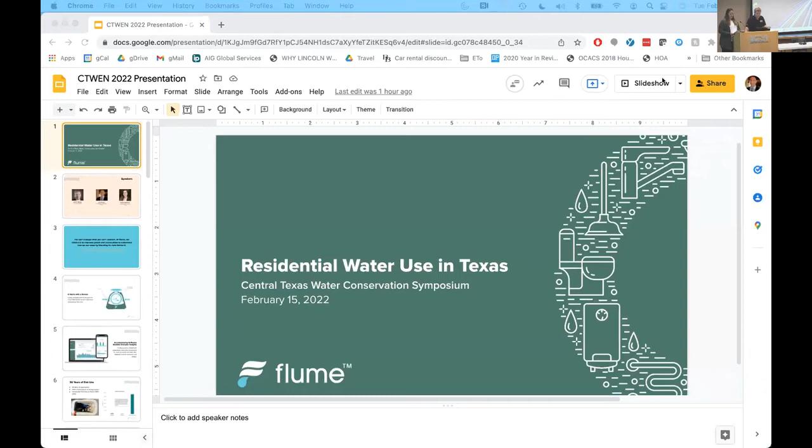But for those of you who haven't seen some of the insights from the magnitude of data that Joe and all the folks at Flume have been collecting on water use in Texas, I think you're really in for a treat. So thank you. And thanks, Joe and company, for joining us.

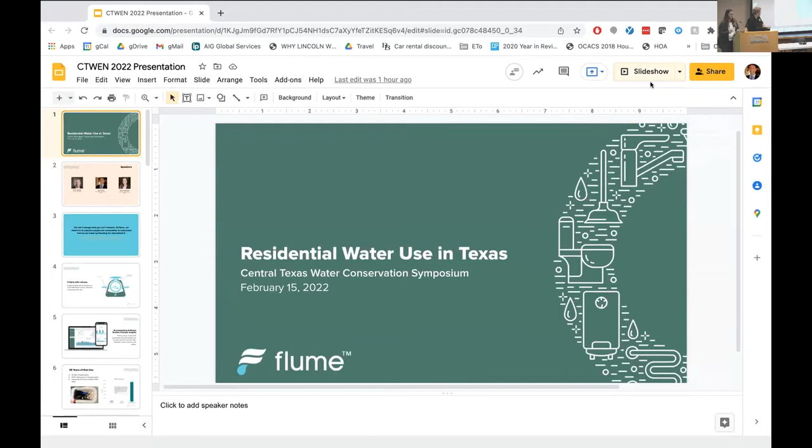We're getting it up on the screen here. We'll let you know. Oh, I think he's going to share his screen. Okay. Can you guys see that okay? Looks good. Yep. Great. Thanks for having us, Martha, and thanks for the introduction. And as you said, I've got Peter Mayer with me here and Sarah Musiker as well. I think Sarah Musiker is on here with us. I'm here. Great. I'm going to let Sarah go ahead and kick things off, and then Peter and I are going to delve into the data.

Awesome. Hi, everyone. Thanks so much for the warm welcome. We're really excited to be here. As Joe said, my name is Sarah Musiker. I direct our utility programs here at Flume, and we're really excited to be joining you all today. Perhaps many of you have heard of us, perhaps others of you haven't. For those that are kind of new to us, Flume is a company that really collects and analyzes water use data from households all across the country.

Joe, I think you're advancing, or someone's advancing the slides. That was me. Sorry. It's okay. I was going to where I thought you were in the presentation. Giving everyone a sneak peek to where we're going, so it's great. So it's no problem. I'll just have you go back to the first slide and we can kind of just jump on from there.

But basically, as I mentioned, we collect and analyze water use data from households all across the country. We work with systems that have AMI fully deployed. We also work with systems that don't have AMI, are going to AMI, or for whom AMI will literally never work for them. And we're happy to work with all communities related to this. We often present our data to our network of utility partners and customers quarterly as part of an ongoing effort to consistently collect, analyze, and report out on real-time water use, both what the water use looks like and trends in general across the United States.

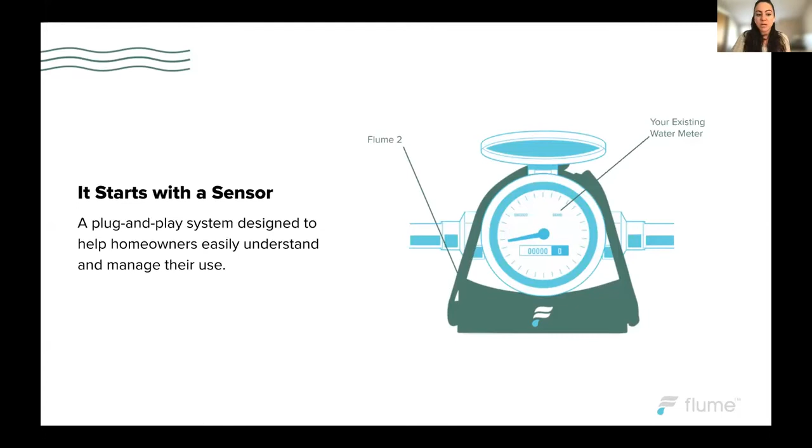Thank you. So as I mentioned, once installed, all that information is immediately online. For customers, we really provide them with that information and it's directly on their cell phones. We do push notifications for leaks. We give them water budgets. We allow them to monitor their use in real time. And this is separated by indoor and outdoor use, but also by appliance and fixture itself. And for utilities, we provide a dashboard where they can see both customer specific or aggregated data across their community, or both, up to them.

And we provide these reports and analytics, really allowing people to dive into average and indoor outdoor, GPCD, GPHD, the impact of weather and drought restrictions on outdoor water use, how key consumption metrics compare to neighboring metro areas, detailed analysis of leakage, detailed analysis by end use and fixture, and more. And our goal is really to enable smarter planning, because this can be used to address water loss, conserve water, increase customer satisfaction, improve land management and population growth planning, and really any kind of insight you're hoping to look for to address local needs and concerns. Do you mind going to the next slide, Joe?

And we think that this data is pretty revolutionary. We're pretty excited about it. For context, generally when we talk about the history of end use studies, or really end use reports overall, there's been a lot of room for improvement. Sample size of all previous end use studies was approximately 3,000 homes and around 300,000 water use events. So that was really everything. For the Flume Water Use Index, which is where we report out all this information, most recently we've examined over 11 million water use events over the course of months, and in some instances even years.

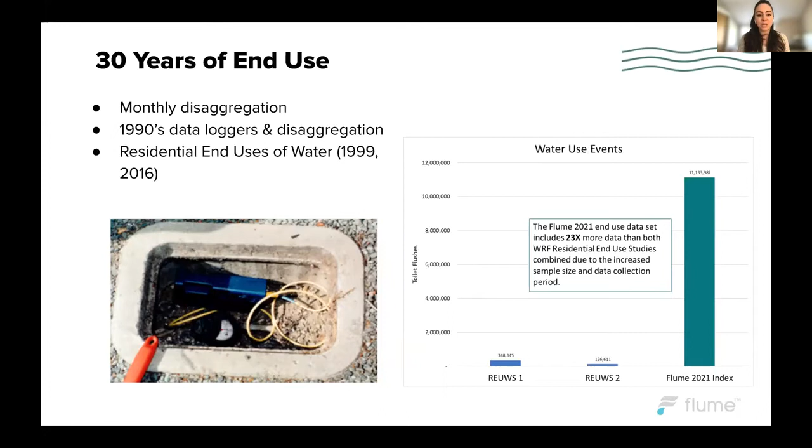Previously, the devices were placed in a home for like 2 weeks or so. And so it was actually just measuring a spot in time rather than actual long-term patterns. The Flume device is placed on a home and really stays there forever. And so you can pull out water use depending on season, depending on time. Looking at obviously 2020 and 2021, two very different instances, and really interesting to see. Also, it's just generally really expensive for a utility to do a study themselves. For context, this device is $150.

And then this is my last slide, and then I'll be turning it over to you all. So we're pretty excited about what we're doing. As I mentioned, we have tens of thousands of these devices pulling data in real time all across the country. They're installed by the homeowner, which removes a lot of administrative limitations or burdens. And we actually do this with a lot of our programs, as we really try to develop programs that remove as much administrative burden as possible to make it really, really easy for you to get these devices out in the field.

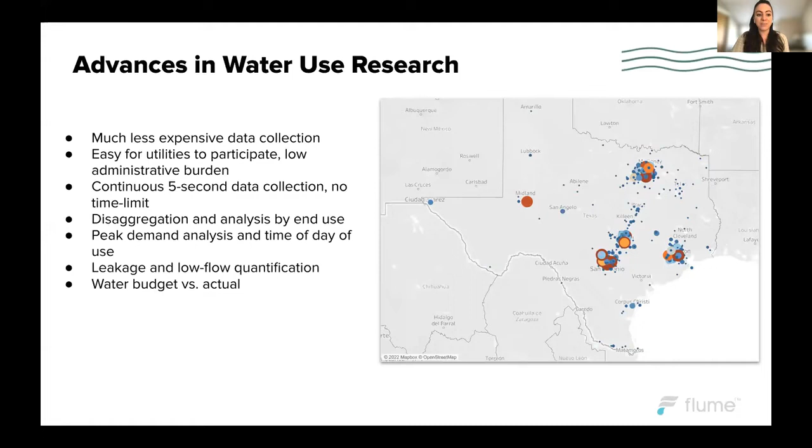We're also going to be reporting water use to you from December 2021 at the beginning of February, which is pretty incredible. In the past, this type of end use analysis probably would have taken a year or more to complete. And so we're able to do this really, really fast. And we have data going back to 2019. So we're looking at arguably around 115 weeks of continuous end use data in the study. And when we talk about why this matters, Joe, you can go to the next slide.

End use disaggregation really enables tracking of who's using water, when it's being used, where the water is going, and how it's being used, and even why it's in use or why it isn't changing over time. And this is a perfect example of that.

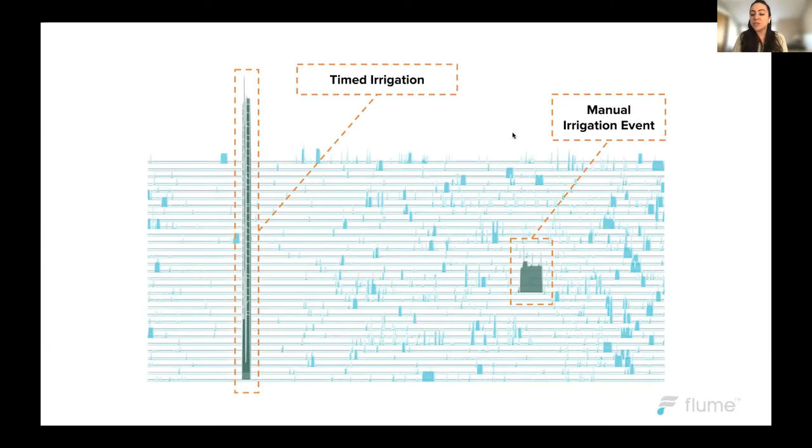And you start to recognize patterns. So for example, here you'll notice a timed irrigation event that's happening in the morning. That's really great to see. But also, are people irrigating outside? We're able to identify these manual irrigation events as well, in addition to indoor water use. This is just an example of some outdoor stuff, but we also can play around with this based off of specific appliances and fixtures you might want to look at.

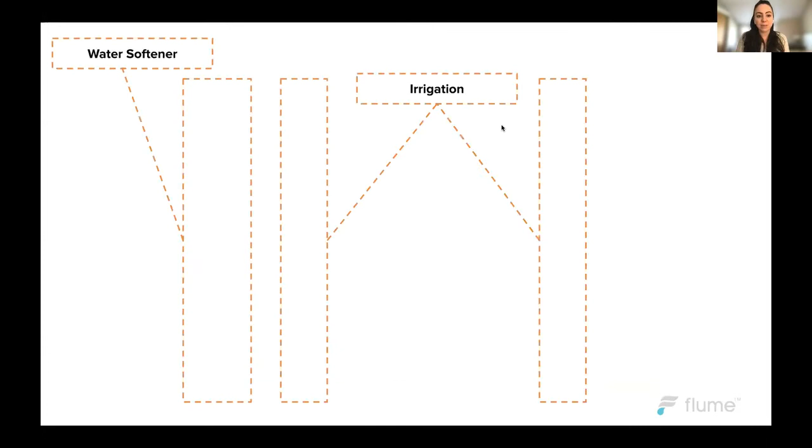So this is another great example. We actually had a very specific request to look at water softeners. Does this community use water softeners? How many people are using them? And so we were able to identify the water use pattern of a water softener and actually pull that out again for the community to really look at.

And this is just a sampling of what we'll be doing for the next 30 minutes, hopefully just 20, so we can do questions as well. But really looking at specific appliance and fixture level end use analysis and a lot more. So Joe and Peter, I'll turn it over to you.

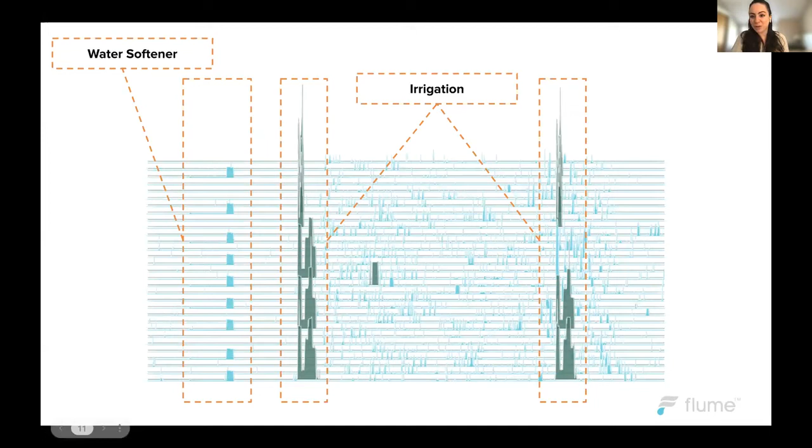Great, thanks, Sarah. Give me 1 second to just shift gears here and get the right thing up.

So what Sarah was describing was really the history of this type of research. And Flume is really the pinnacle of what is 30 years of this type of data collection and analysis, where you attach a device to the water meter and collect high resolution flow data from the meter and then interpret that. So it's really cool to see how this concept that I've worked on for a lot of my career has tremendously advanced through having so many devices across the country.

Yeah, and it's great because now they're all there, and someone comes to us and says, "Hey, we're trying to understand water use in our area," and we can say, "Hey, we've got 500 Flumes already installed in your area from people that bought these on Amazon," and we can start to take a look at the data. So it's cool to be able to do that without a whole lot of burden of getting the data collectors in place. And that's a good segue here, Peter.

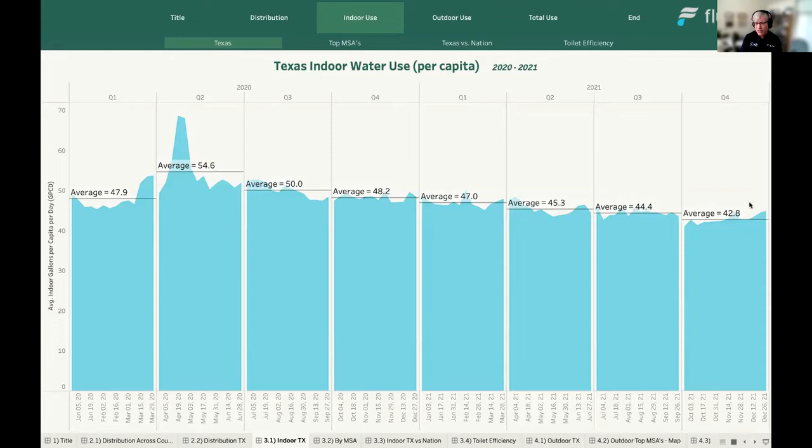We know the number of people in each house because that is something that is reported when the device is actually installed. And so we're only calculating this for homes where we actually have those data. Maybe we could just focus in on the fourth quarter and take a look a little bit closer at what's going on just in this most recent period.

So one of the things that you can see is a couple of little spikes. I think one is Thanksgiving, probably right there, and then another increase in indoor use towards the Christmas and New Year's holiday too. Something else that is kind of expected, but I don't know that we've ever been able to see it quite at this level of resolution before.

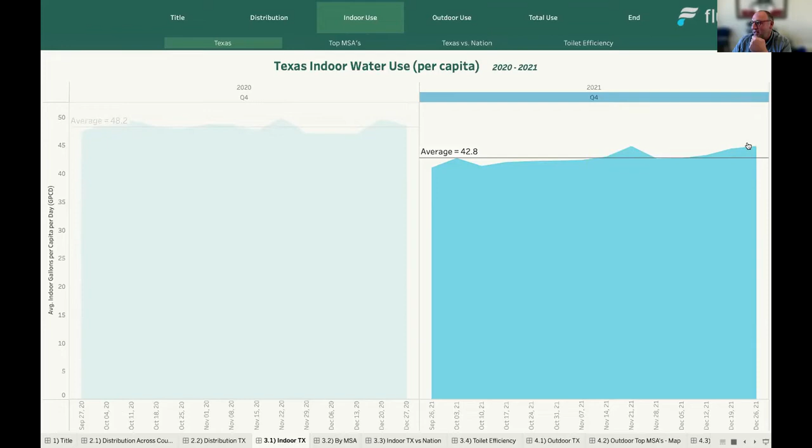In fact, Peter, you and I have been working on a lot of specific reports for different communities, and it's kind of fun to see the blip at this level, just at the indoor level, but you and I have been delving into what goes in to make up this indoor use, and it was very funny to look at dishwasher use, and specifically dishwasher use was just really peaked on both Thanksgiving Day and Christmas Day. So that was kind of interesting to see as well, what makes that up. Yeah, absolutely.

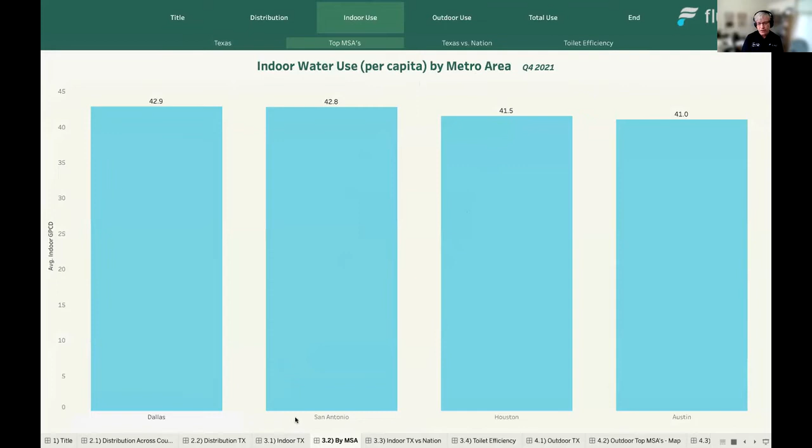We're able to explain differences. And so if you just look at the comparison now between metro areas. So this is the average gallons per person per day for indoor water use for 4 metro areas in Texas: Dallas, San Antonio, Houston, and Austin. And so this is quite similar, actually, I would say. The range is from 41, the low in Austin, up to 42.9 in Dallas. But overall, the low 40s is a relatively efficient level of indoor water use.

Previous studies, 20 years ago, we were measuring indoor use at about 69 gallons per person per day. The 2016 end-use study measured it at about 58 gallons per person per day. But we knew that with WaterSense and more efficient fixtures, it was possible to go down to 35 gallons per person per day. So I think these data are really bearing out the fact that efficient fixtures and appliances can make a big difference in water use.

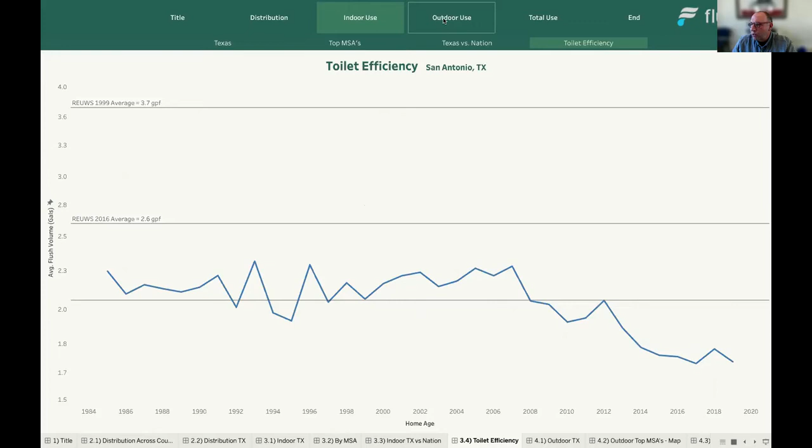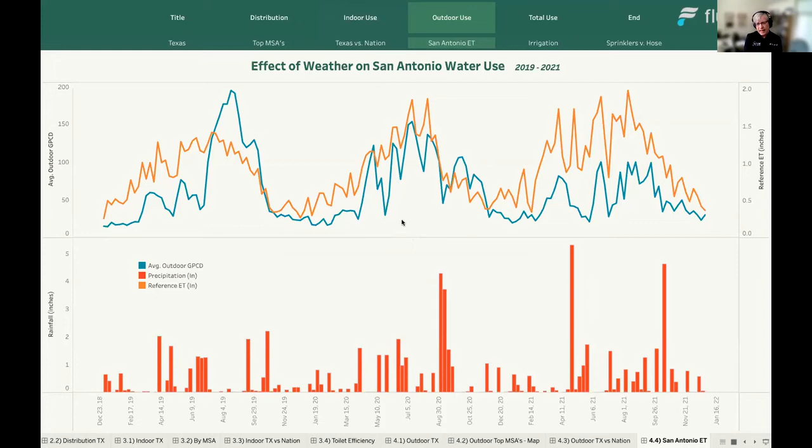You got a little bit of it happening here, but certainly not by that magnitude. This chart also illustrates how responsive customers are to changes in the climate. The systems really do get shut off, and customers really are paying attention by and large. And we've got some other data that show that quite interestingly.

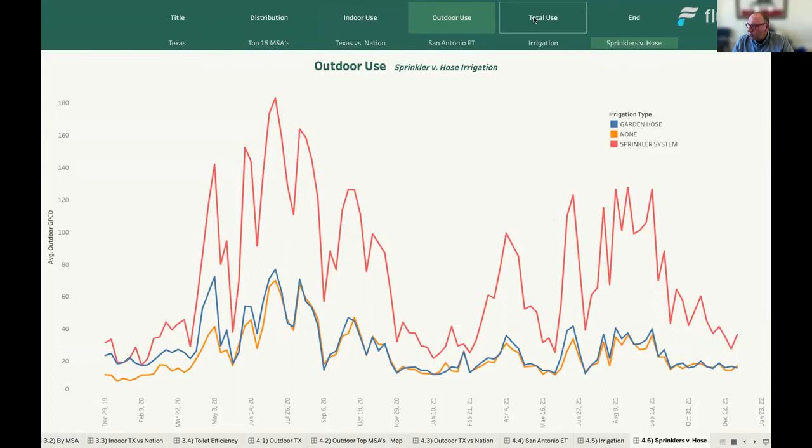Right, and I think I saw one question people were asking about whether it might be people who are more water efficient who are installing flumes in general. Our experience in San Antonio is that actually it's higher water users, certainly on the outdoor side at least, that have by and large installed flumes. And we know this also from comparing the average lot size and property value too.

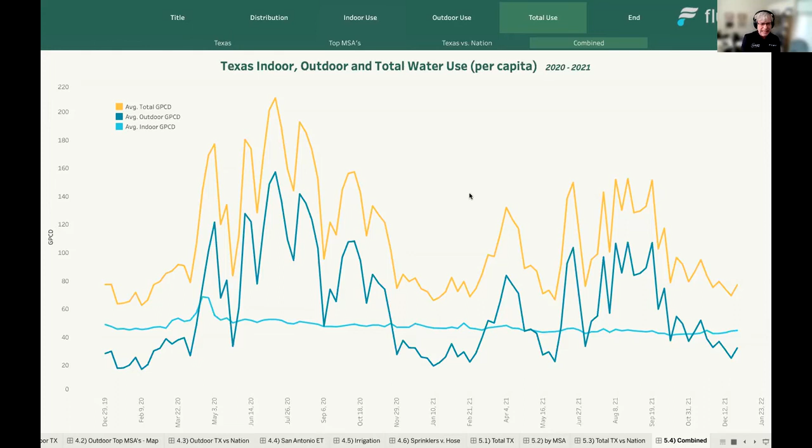We've also done some analysis, not in Texas, but in California, where we compared the flume users to the population using their historic billing data. And on the indoor use, it was indistinguishable. It was really no different from the broader population of single family accounts.

Well, great. That was the extent of the data we wanted to present.